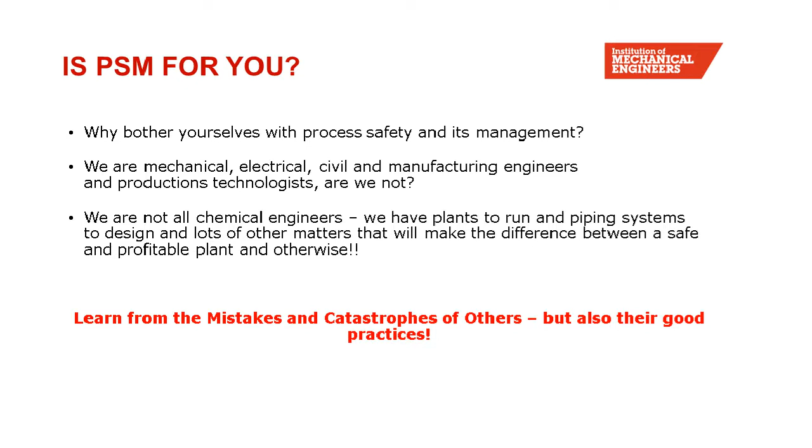Now, the background for me - I'm a member of the Greater North West Centre, and we have somewhere up to 20,000 people involved in the process industries. I've worked in, for example, fast breeder reactors, chemical reprocessing plant, pressure vessels, saturation diving systems, bells and chambers, hovercraft and submarine propulsion.

We try to reveal to students and pupils locally just how wide and varied the process industries are, especially in the Northwest. It's the variety that we can get in the process industries if you look for it, more to the point, if you know about it.

Engineering at all times, the approach to process safety management is applicable to the design of procedures and to plant, and the world of engineering is complex. It is our contention on the North West Centre Committee that mechanical and electrical engineers tend to be brought in a bit too late at a stage of design development or layout.

We need to be brought in at the conceptual design stage, and we need to be able to help people distinguish between what may be seen in HAZAN or even HAZID as minor events, and point out the possible stages that could lead from minor through major to a catastrophe.

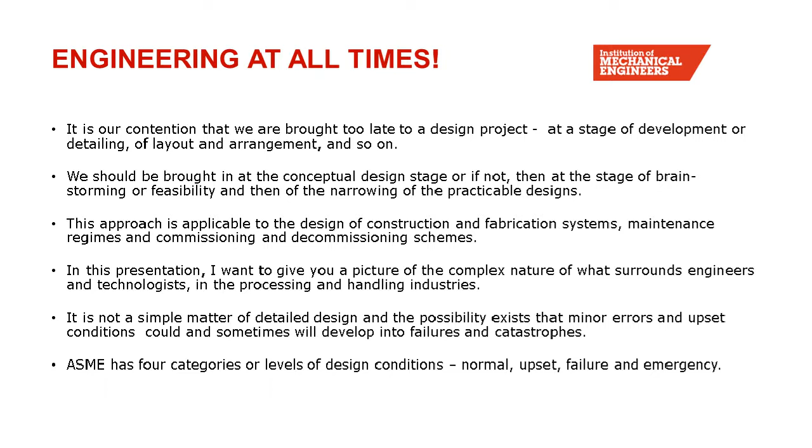If you think in those terms, it helps you to get things in perspective, but it also helps you to go back in the plan or the plot to find out why you're being asked to do something in this particular order. And you may well be able to challenge it then.

Now, this might sound like a bid for world domination, but it is not - well, not a lot anyway. It's an appeal for greater recognition of our manufacturing engineers' obviously underappreciated skills and usefulness. Also, process safety management is much more than occupational safety, which is how many people tend to view it.

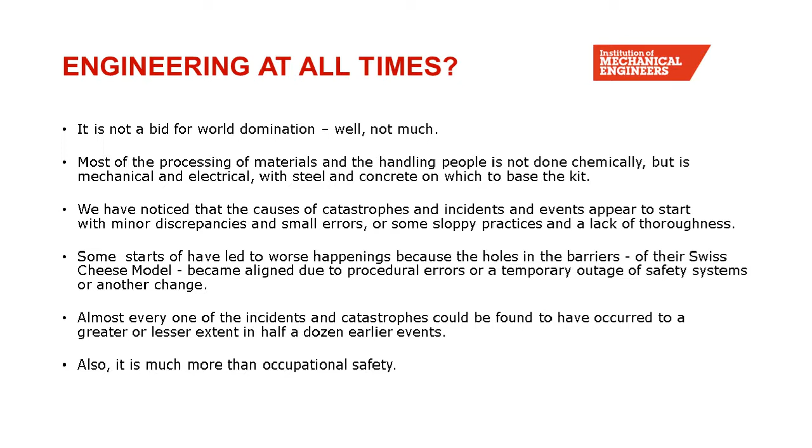At one end you have the process safety of the chemical reactions, and at the other you have the occupational health and safety practitioners. Somewhere in between are the people who make the plant work, design it, build it, and put in various obstacles to the progression of minor faults into major ones. It's those people who have a key role, and who can help put barriers in place to prevent that development.

I'll try to provide ideas and sources and examples for us to use as individual engineers and technologists. Richard Roff, in his presentation of the 20th of May, presented the business and company approaches that can be taken. In this, I concentrate on providing ideas for individual engineers.

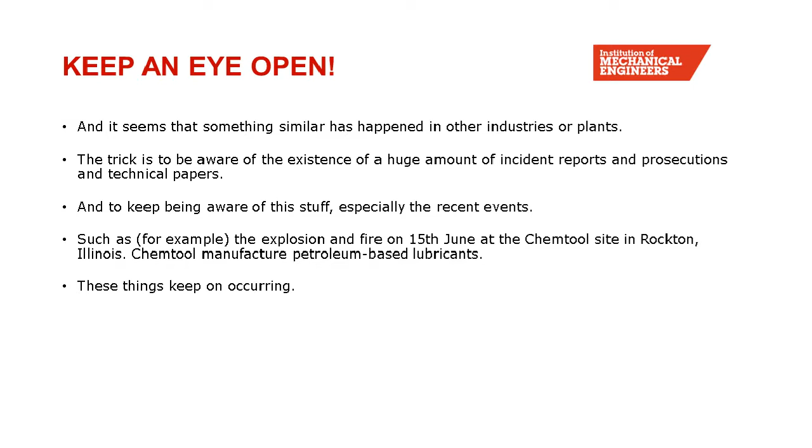So what to do? Well, keep an eye open. Almost always, your plant has been designed somewhere or other, operated somewhere or other already, possibly for years and years. Mistakes have been made. You should look out for these, and that's a deliberate act to, in some way, interrogate the company database, the corporate database.

The trick is to keep aware of it, despite the huge amount of information. There was, for example, an explosion just two weeks ago at the Chemtool site in Rockton, Illinois, on the 15th of June. A manufacturer of petroleum-based lubricants, and it was a fairly simple thing that went wrong. Yet it was not a chemical thing that went wrong, but it led to quite a bad explosion and fire, possibly fatal.

Funnily enough, there was another one just before that, April the 8th, a paints and polymers plant, again in North America, in Ohio. Fatal, just one killed, but it was steam or gas heated kettles used to condition resins. It's fairly well known stuff, but suddenly we have an explosion and a fire, and deaths. There were 21 people on plant; luckily only one was killed. These things keep on occurring. Despite all the design reports, the evidence, even seminars and so on, they shouldn't be, but they do.

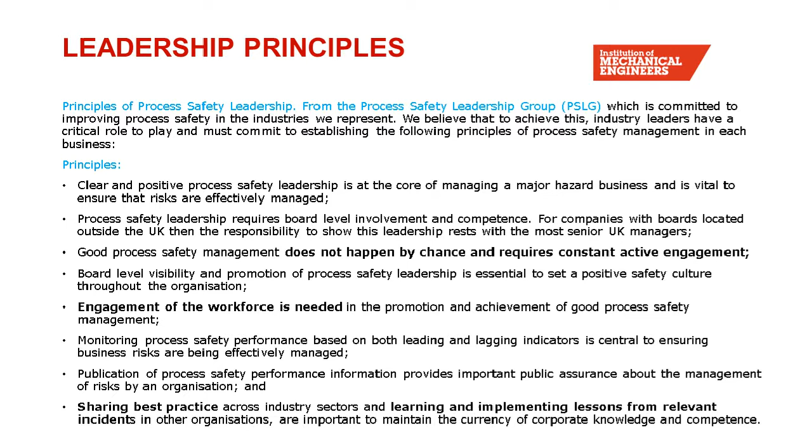You can't spend your own time doing it, but you can tap into the written sources, and you should. Finally, on this slide, sharing best practice, which is what we're about here - that's across industry sectors. Some of them don't seem at all relevant at times. And learning and implementing lessons from relevant incidents - this is learning from experience. It is important, and if you don't do it, I think you'd be pulled up about it should you ever have to appear in court.

There we are, that's the next one. You need to engineer these things early.

You might be thinking, as I've said on the slide, you've got enough on your plate to clear the processing swamp. So if you do get into problems or wonder why, try and go back to the Hazids. These are a rather neglected area in not a few organisations because people think they know all about it. The plant's been operated safely for the whole of 10 years, it operated safely last year - what's going to change?

So before you go into the Hazans, and Hazans are tedious, I know, you should have a look at the Hazids, see if they've got your part of ship, as we say - your bits of expertise, your piping, your vessels, your ventilation - covered in decent detail, rather than the bog standard detail of having got brackets and so on. Where's this pipe going? What's it being subjected to?

Think about the project or the plant as an end-to-end scheme for handling and processing. An example was reloading nuclear fuel into a submarine in the dockyard, and you can view it as a set of facilities: the docking down facility, the ion exchange processing facility. What we suggested was that you treat it as a spent nuclear fuel handling process, where you ship it in wrapped in a submarine, you open the reactor and drag it out, you then shield it, you then send it for processing. If you do it that way, you are keeping your eye on the main hazard, and you can look in detail separately at the risks of that hazard - for example, the submarine being swamped in the dock, a tug taking it out.

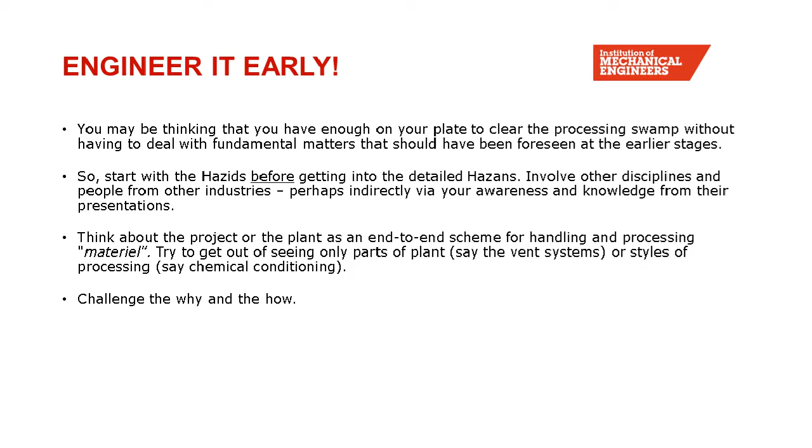To help you with the work that you're doing, we have the risks and the laws surrounding what you're doing. You need to understand the risks of your project, obviously. You can't understand them all, but there are people that can help within the organisation, and you should be sensible enough to apply it. Safety and risk management, after all, are everybody's business.

Have you done all that's reasonably practicable to remove, or at least minimize, the hazard and the risk that it's subject to? If not, and you do appear in court, you'll be asked why not. It's very easy for lawyers to say, well, why did you not take an hour just to look into it? Well, you've got a lot of other things going on.

Unfortunately, or fortunately - I think it's a very good act - you've got the Health and Safety at Work Act to chase you, the EU six-pack of regulations, you've got COMAH and similar, and a variety of other bits of legislation. Most of it's criminal, some is civil. If you don't know that they exist, and not many people are that familiar, it is time that you did, and you can find out just how exposed you are to the challenge of not being professional enough, whether you're mechanical, electrical, chemical, civil, or whatever the discipline.

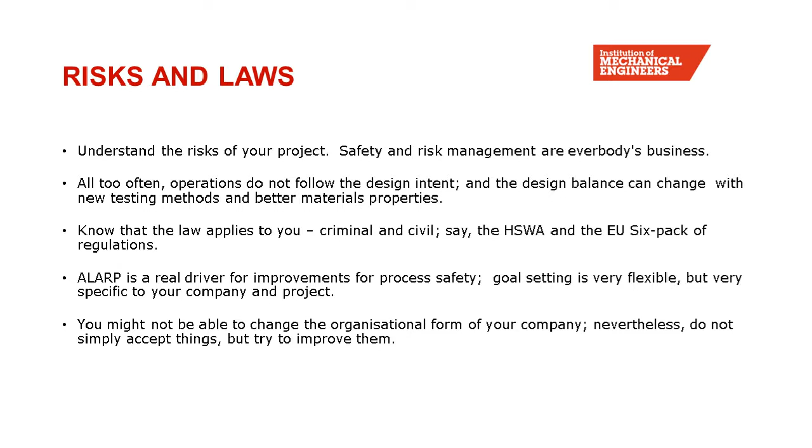Yes, goal setting is really useful because you can, by taking a step back, decide what it is overall that you in your part of the plant are trying to achieve. It's very woolly, and at times as a regulator you feel like you're the shepherd trying to herd cats. Engineers are quite individualistic, and they are precious about their discipline, which is a good thing, but not always.

Now, while you're doing all of this and worrying yourself to death, here are some other things to worry about. The EA in this country is considering linking the net zero target of the government and the climate changes being sought to the hazard of extreme events such as wind, temperature and coastal flooding. Fukushima is a good example of what can go wrong - there was a huge tidal overtopping of the barrier walls. New legislation is on its way, apparently, with a view to placing a requirement on regulators to influence companies. That sounds a bit prescriptive, does it not?

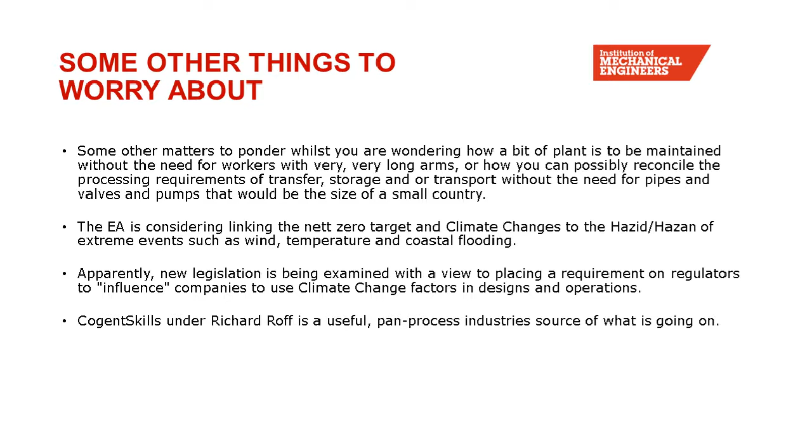Other places to learn? There are many, as I've said - dozens and dozens. One of them, and this is a puff for the Safety and Reliability Group in IMechE, is that they have one on human factors, which play a key role, as you can read, in productivity, reliability and efficiency in engineering practice. It could well help us to learn more about our own ways of working. It will have more studies and examples, which are always welcome, as long as they're relevant, of course.

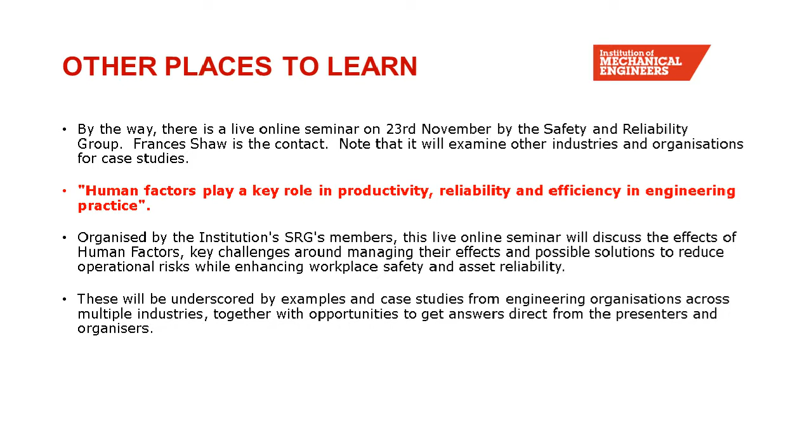Now you're perhaps wondering, does this apply to me? Am I a process industry?

Well, after much woolly thought and deep consideration, we decided that process industries include water and utilities, food and pharmaceuticals, mechanical handling, nuclear fuels manufacture, and all stages from conceptual design to decommissioning. In the Northwest especially, we've got almost every one of these, from baked beans bakeries to nuclear fuel manufacture and processing, submarine building, processing equipment building, all sorts of things.

Not very long ago, there was a wood chip handling or manufacturing plant at Bosley near Macclesfield, and that blew up, and that's just been reported on. We make munitions too.

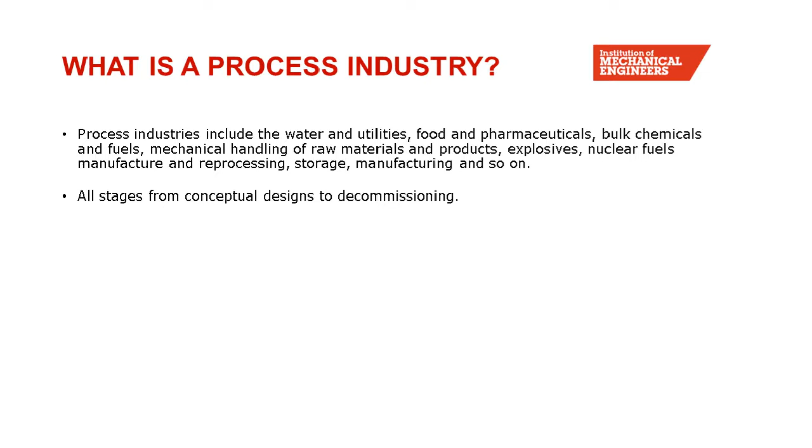More unwanted events from the chemical industries in this case. There is the plant where the plant didn't explode, but a blower did, and luckily the guard that was there to stop you putting your hands in, to make it process operator proof, luckily stopped the fragmentation bits from going too far. Luckily there was nobody around.

In this case, the AIChemE's Centre for Chemical Process Safety in the USA published a sheet on the hidden chains of hazards, which is available under their Process Safety Beacon publications. They published a sheet on this, and it was a restart of plant problem that's been done a few times before, but the pulley on the blower of a mist separator broke suddenly whilst rotating, and the exploded fragments were captured, which is a good thing.

It was a check valve that had filled with water. There was no way of checking the check valve for whether it operated or not. Usually it was under a water seal. It wasn't a chemical fault. It was a simple and well understood process, but something went wrong in the mechanical bits. In this case, it could have killed somebody.

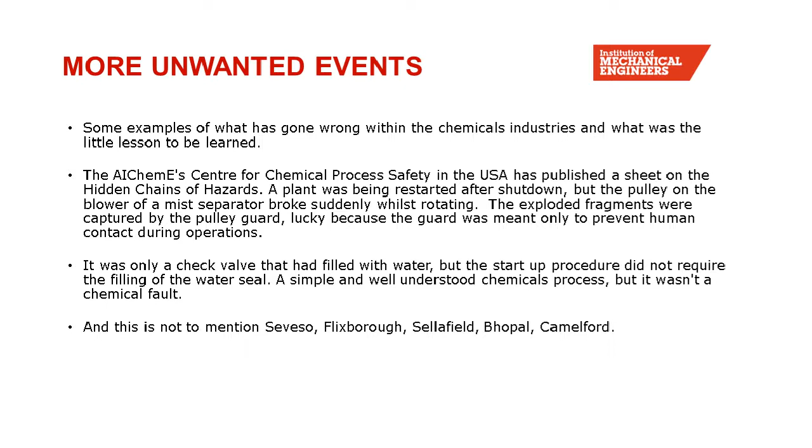Understanding incidents: the Process Safety Forum is a very good source of information and opinion. They published one of their learning briefs, number 022, and this is addressing COVID-19 risks.

It's thought this was a styrene leak from the LG Polymers plant in Visakhapatnam, and it was caused by failures in restart. People didn't do what was required, partly because there just weren't enough people. They were on COVID furlough, shall we say.

Two chemical tanks had been left unattended since March, and we're looking now at May, only two months, and a full investigation is yet to be completed, but a gas valve malfunction, just a gas valve. Again, was it not inspected? Should it have been? Was it recognised? It went, and it looks like something like COVID-related disruption.

This is one of the barriers of the Swiss cheese model. There are four, broadly speaking, kinds of barrier: organisational influences, supervision, preconditions, and unsafe acts. And this looks like a precondition for failure.

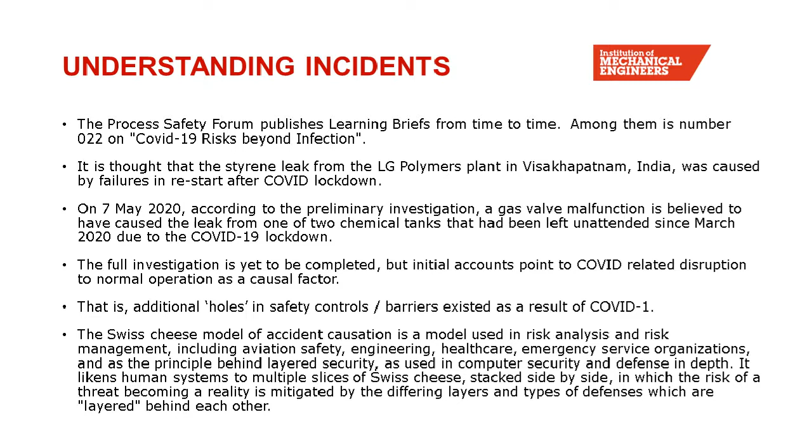If you want to follow up the Swiss cheese model, it was devised by James Reason of the University of Manchester. It's also called the Cumulative Act Effect. And that, again, is where we come in, our little bits and pieces of omission and commission.

There on the right are the four types of barrier. It's not at all an easy read, this slide, but you can see the principle that you have the various barriers to mitigate whatever is going wrong and to prevent it becoming much worse.

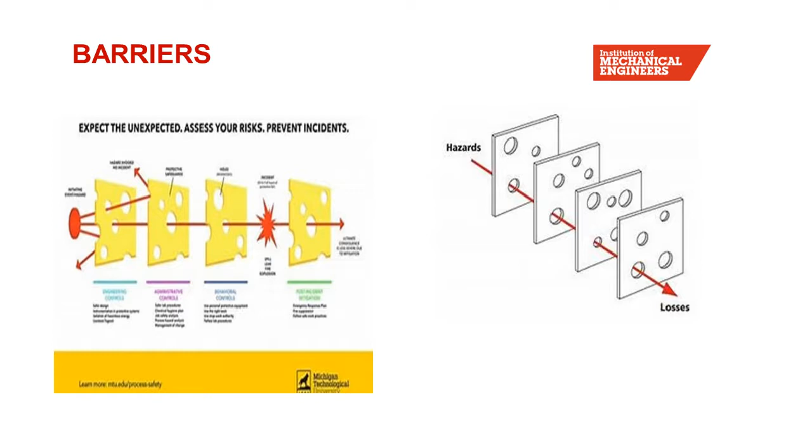It's a very difficult thing to define, process safety. I've tried elsewhere. I've been helped, but only by means of, here are our ideas on process safety leadership or process safety management. This is the best I've come up with.

Again, it's from America. Process safety is major accidents prevention. I think we could all agree with that. To my mind, it's not only major hazards containment, although if that worked perfectly, there wouldn't be any releases and toxic gases going out, but then you would never be able to shift the stuff.

Industry success is seen as new or modified standards and practices. We get them, but usually after the event. Instrumentation, mechanical integrity, operator procedures, management systems - not dissimilar from the four broad barriers of the Swiss cheese model. It is, in short, major accident prevention, hazard containment, and that containment happens at many stages through the design, manufacture, fabrication, etc., all the way to and including decommissioning.

It's also appropriate to the risks in minimizing the intermediate hazards and states of things like, and I hate to mention this, containment of spoil heaps like Aberfan, tailings, dam failures, liquors. There were small leaks at Sellafield. One of them began with a fillet weld. There's more of that later.

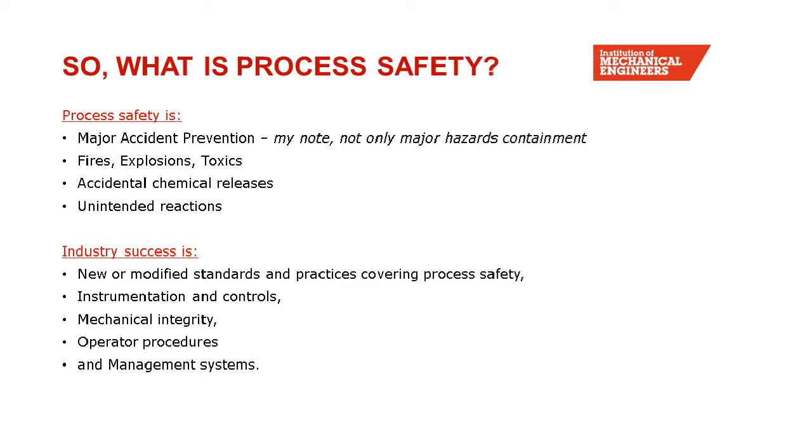Those words are taken from this lady, a senior chemical engineer with many years of experience, and she gave this presentation, of which that is a part, to the young members session of the AIChemE in America. She's a president of another company. The president made the point that process safety is the responsibility of everyone, not one department.

Management of change. You need to keep the changes under the same duty of examination, care, thoroughness as the original design and build. And it isn't just paperwork, safety cases and so on. I've heard, 'we have a safety case, so we must be okay.' The safety case is for the operators, the owner's use, and not just for the regulator.

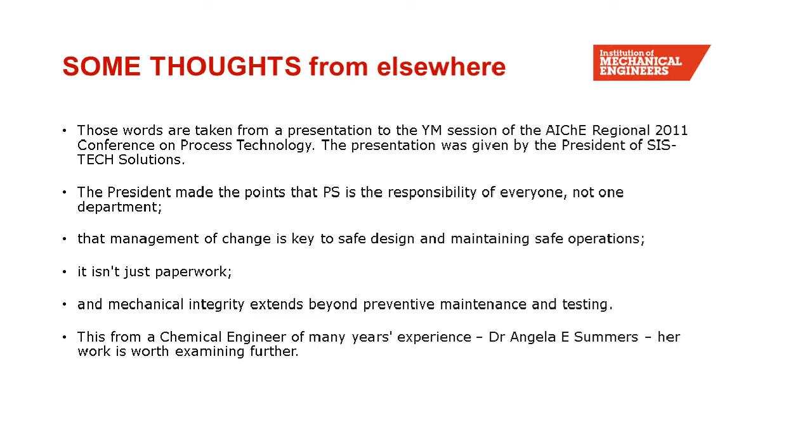Note that she mentions specifically mechanical integrity, and that it extends beyond preventive maintenance and testing. There she is, Dr. Angela Summers. Her work is well worth examining further - this is what I've been doing just recently. And she's a chemical engineer.

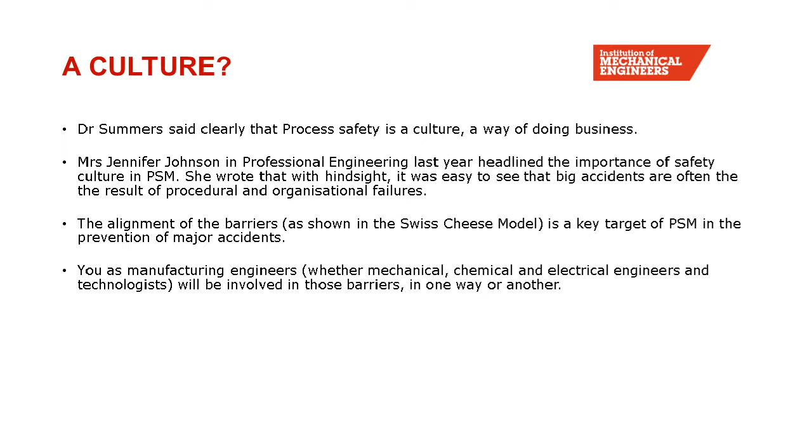She did say clearly that process safety is a culture, a way of doing business. This is Jennifer Johnson, Professional Engineering last year, headline reports of safety culture in PSM. You need process safety leadership, and you need to be thorough. And you will be involved in the barriers one way or another.

Safe or reliable, or is it some other state, some other state of complacency? Well, despite alignment of barriers and so on, the HSE found that the focus on avoiding serious accidents had led to some operators offshore to neglect general plant maintenance. This is what other people have found, and there is a balance to be struck.

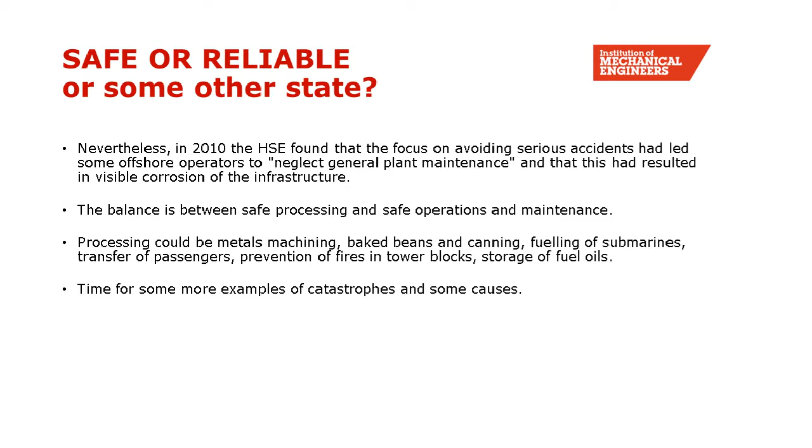The processing could be any one of those things. It does not need to be in oil and gas, from tank to disposal. It could be at any one of those stops. And if you don't maintain the thing properly, you don't install it properly, you don't design in detail properly, these things can catch you out. Unfortunately, they catch you out too often, as you can see from the list of 69 items.

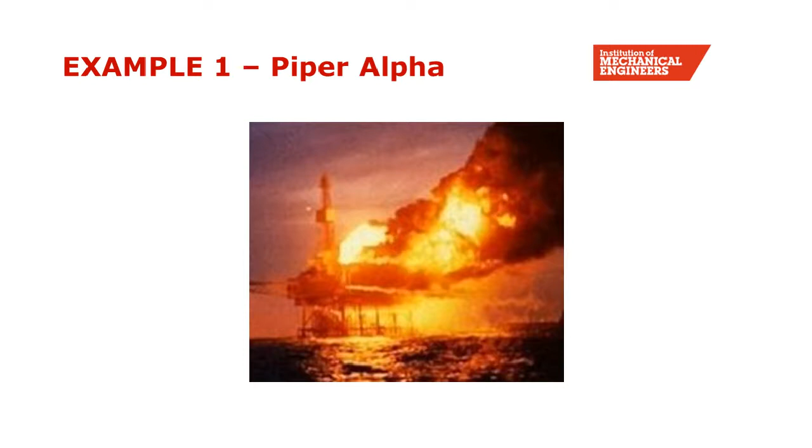Here's a big example, Piper Alpha. I was in Glasgow at the time it went off and wondered why there were so many helicopters available. She caught fire in July 1988, 4 main causes, but the Cullen inquiry reported that it wasn't just, but they reported that it was a condensate leak and the result of maintenance on a pump and a related safety valve. Nothing to do with downhole this, mud that, giant pipelines and so on, just a bit of maintenance. It's one of those things where the Hazid people may not have picked this up, but there's no feedback to encourage them either. It was a perceived or assumed safe state.

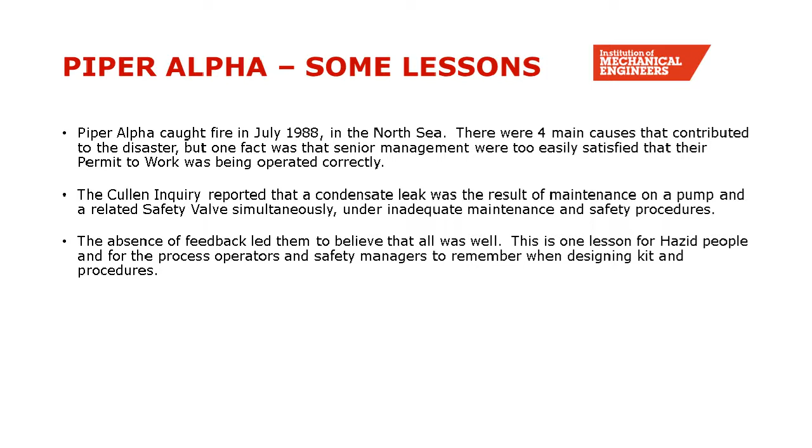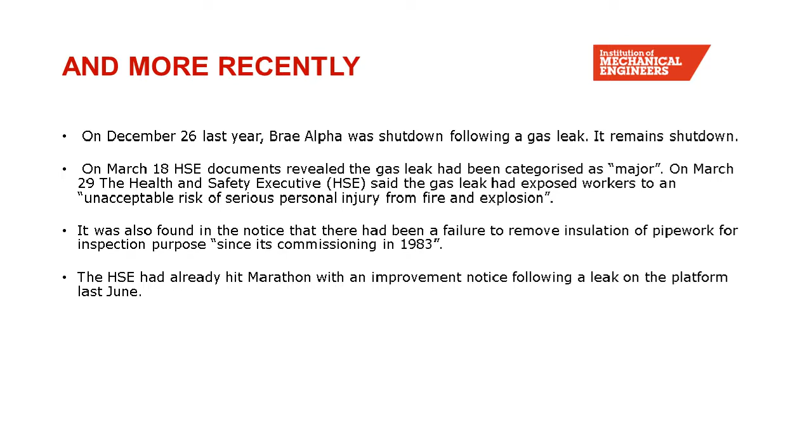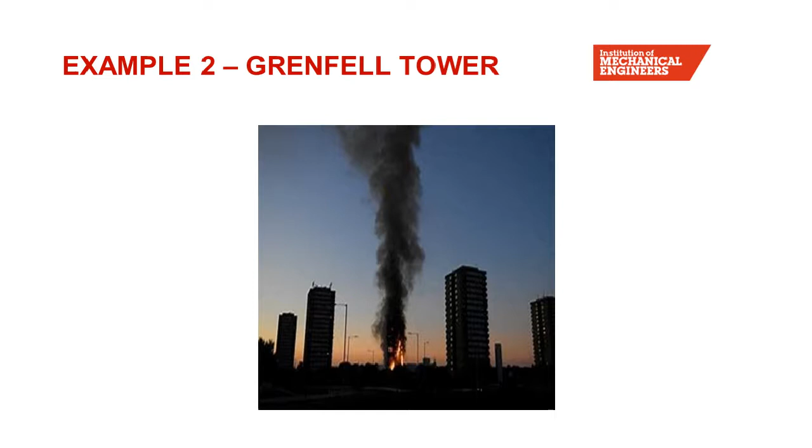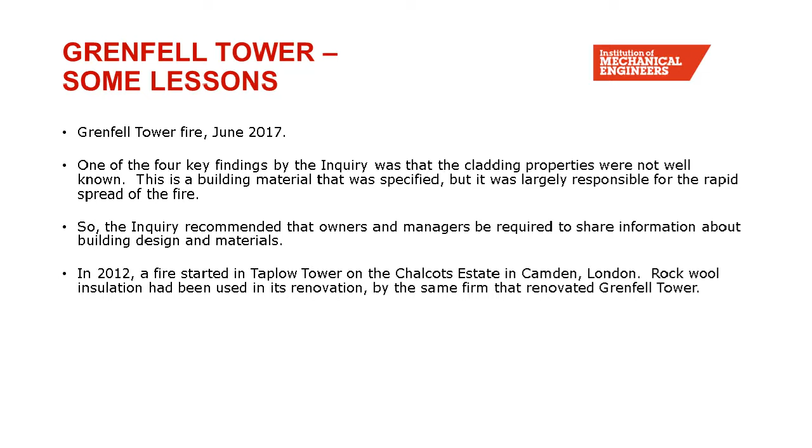Another example, completely different industry, is Grenfell Tower. That was June of 2017 in London. Again, 4 key findings from the inquiry, but one for us was that the cladding properties were not well known. Why not? You can look them up, etc. But they weren't well known, and despite that, it was largely responsible for the rapid spread of the fire. So the inquiry recommended owners and managers be required to do it, and there was a predecessor - it appears Chalcots Estate.

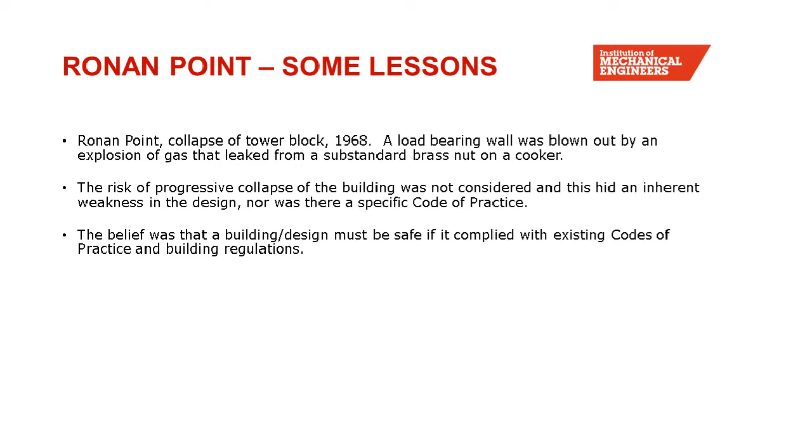Another example is Ronan Point. In this case, it was a progressive collapse. Things had been noticed about it, groaning and so on, but the belief was that building design must be safe if it complied to the regs. Well, Miami-Dade has just collapsed at Champlain Tower South, and that was a progressive collapse, possibly the same sort of thing, and they'd received thorough engineering inspections over the last few months.

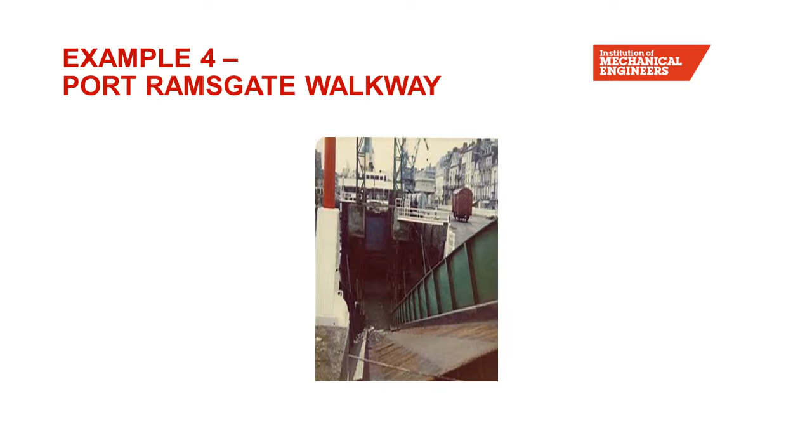Another example, but from a different industry, is the Port Ramsgate walkway. I cannot find a slide for this one, so I took one from a couple of years before, 13 years ago I should say, and it was the ramp to the ferry, and that went the same way. It was a link span ramp, and down it went.

In this case, the Port Ramsgate case, the collapsed walkway killed 6. It was a matter of calculations not being done properly, and this is either done or checked by 3 different organisations.

These things can catch you out. I found a factor of 10 error in the decompression chamber's design pressure. They converted it with a factor of 10, but did it twice, so that 30 atmospheres turned out in the design to be only 3 atmospheres. Luckily, the thing was well thick enough.

In this case, there was another fillet weld, and this was on the little wheels. There were only 2 of them that allowed the thing to slide to and fro as the railroad ferry moved. And that was it, that took the load.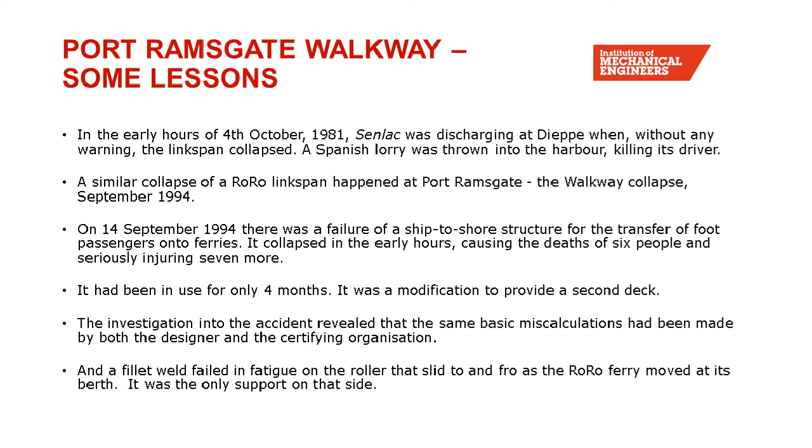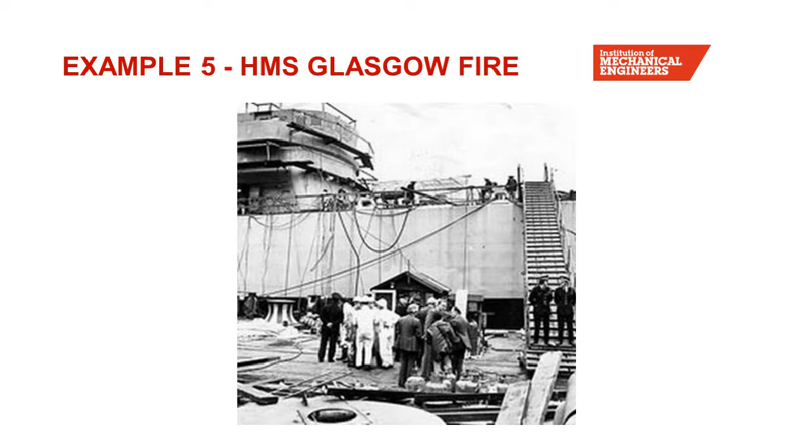Another horrible example, this case, HMS Glasgow's fire in 1976. They got temperatures of apparently 1300 degrees C. Horrible way to go. And what was it? Well, it was pressurization of the manifolds, which allowed pressurizing of the hoses gently in an oxygen-enriched atmosphere. ALARP, I think, would expect depressurization of the manifolds and hoses.

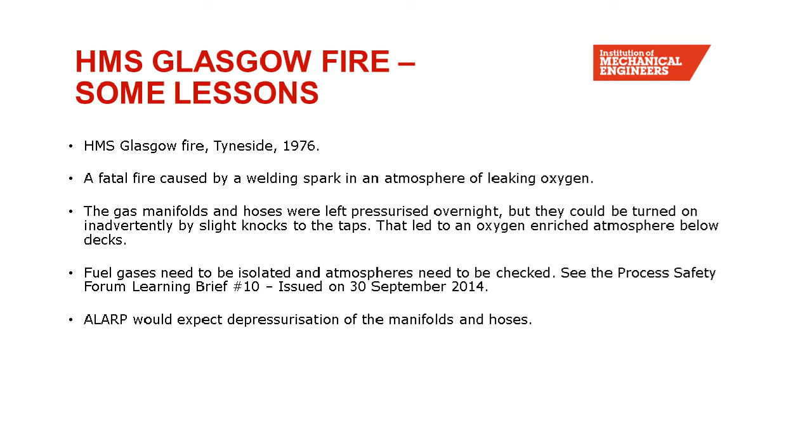Not a difficult thing to do. What was it in the hazards? Finally, King's Cross. King's Cross was a rubbish fire in November '87.

Rubbish and grease under wooden escalators. This had been identified, I'm pretty sure, but ignored. May '85, the Bradford City fire killed 56 people. Again, rubbish under a wooden-roofed old stand with wooden seats, probably, not cleared out. It was allowed to pile up, but it had been noted and they'd been told they should do something about it. The stand had been condemned and was going to be demolished starting in a matter of weeks after this final match.

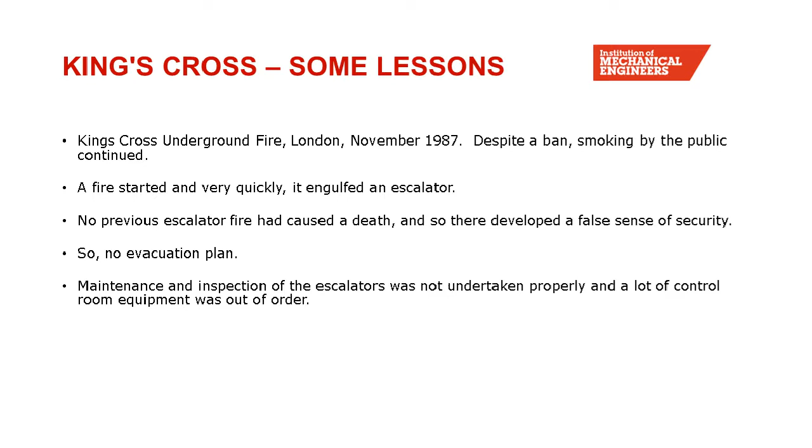Poor maintenance, no learning from experience for King's Cross. It does make you wonder, and people will ask, why did you not take any notice? No evacuation plan. There wasn't a plan for Bradford.

Conclusions. Take a step back, as I've said. Think about it as a process from beginning to end, not just your little part of piping design or ventilation. Seek out for sure what's been done, especially badly or accidentally, wrongly, beforehand. Be thorough. Have you done as much as is reasonably possible to minimise the risk and hazards? That is the key. It makes you think a bit wider. And then learn those lessons. Steal them with pride. Don't be afraid to pinch their ideas. And that's for your own project and for your own professional protection.